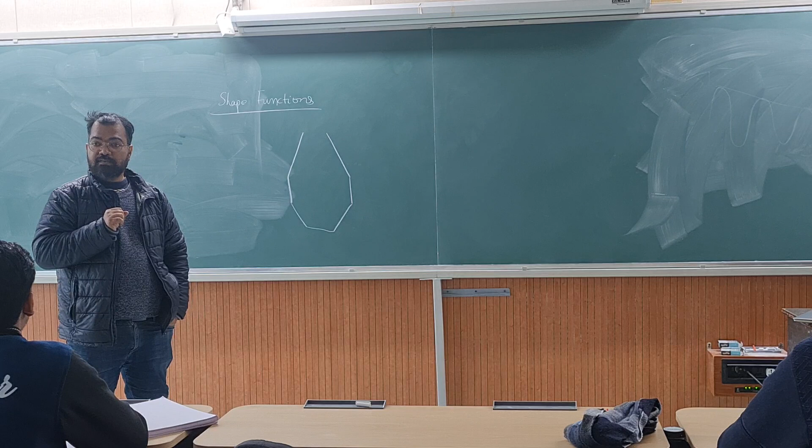Material is known. So how thick a plate will you take? You will have to take a plate and bend it, weld it. You will be welding it. Then you will take another plate and weld it. Then you will take this part and also weld it. So welding is involved.

So what thickness of plate will you take, and how will you decide that? You can't make the full blast furnace and check if this thickness works or not, because that will take 10 years. So what will you do?

Just give me a prototype. How much load should it bear? It's a real blast furnace. How will you do it? How will you calculate how much forces are coming on this side of the plate, on that side of the plate, here?

We know the volume, we know the shape we want to make. We'll do some mathematical calculation, and we'll test in the sample how much load it can bear with this force.

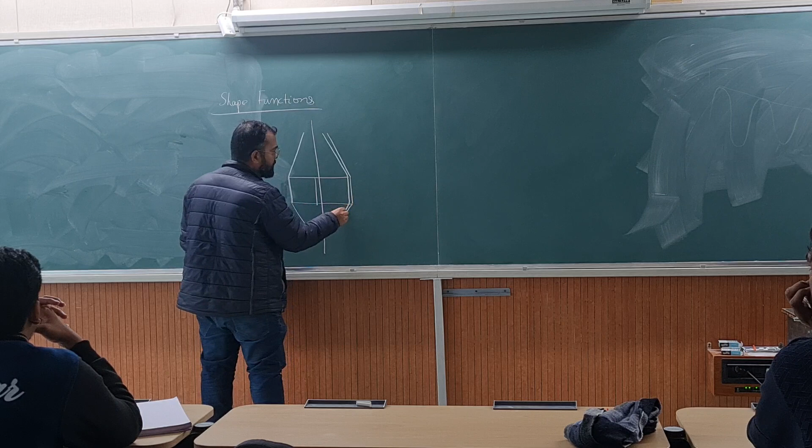So what you can do is you can define this problem as an axisymmetric problem, right? And you don't need to model the whole thing. You only need to model this one thin section which is symmetric along the axis of the blast furnace. Take some thickness and then you model the piece.

So make the piece, make the sketch of it, and then either you do hand calculation or you allow some software or coding so that this plate behaves like the material will behave, whatever material you have chosen.

Okay, so suppose you have chosen mild steel. So what are you expecting? Obviously there is going to be elastic deformation, right? And mild steel is isotropic, so you need elastic modulus, Poisson's ratio.

Done. It might deform plastically or not. You want to make sure that it will not deform plastically, correct? You don't want your blast furnace to become a barrel furnace after 5 years. So you don't want it to deform plastically. In order to ensure that, you need to know how it deforms. Is this making any sense to you?

Yes. Okay, so what do you need? You need yield strength. Also, you need the strain hardening behavior. So suppose this is the stress-strain diagram of the particular type of steel which you are choosing. So you want this behavior from here to there.

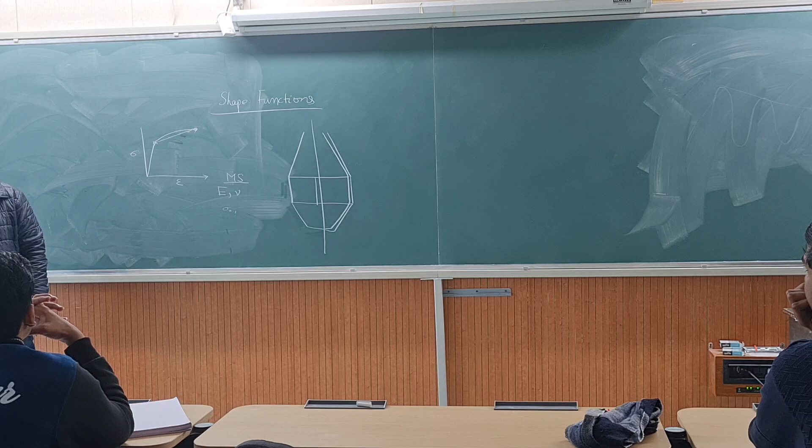A very crude way of doing that would be to take only this point and that point and immediately assume something. Okay, that is not conservative—oh wait, that is conservative, because that is the worst behavior you are taking. So conservatism is good, but over-conservatism is not, because you are not realizing the full potential of the material. Based on this conservative calculation, you might choose a very thick plate which you don't need, which will unnecessarily cost you a lot of money because you are making the blast furnace.

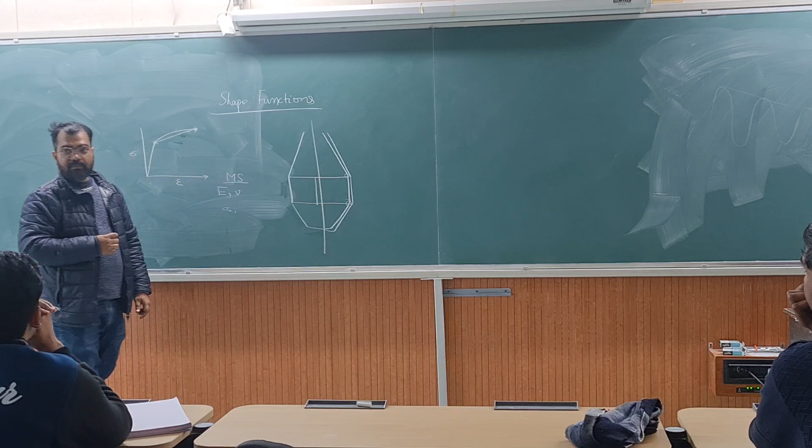So you don't really need to make the whole thing, you just need to model it. Instead of imagining the effect of curvature, because there is an angle there, there is an angle there. Material is deforming elastically, plastically, so you need to update with how much amount of strain is coming because of the forces.

Apart from that, you also need to take care of the temperature. There is a temperature, there is a ceramic lining. This ceramic lining will have some thermal conductivity. So how much temperature is there, how much temperature is here, and then you will assign that boundary condition—on one side you have that temperature, that side you have that temperature. So thermal strains will come.

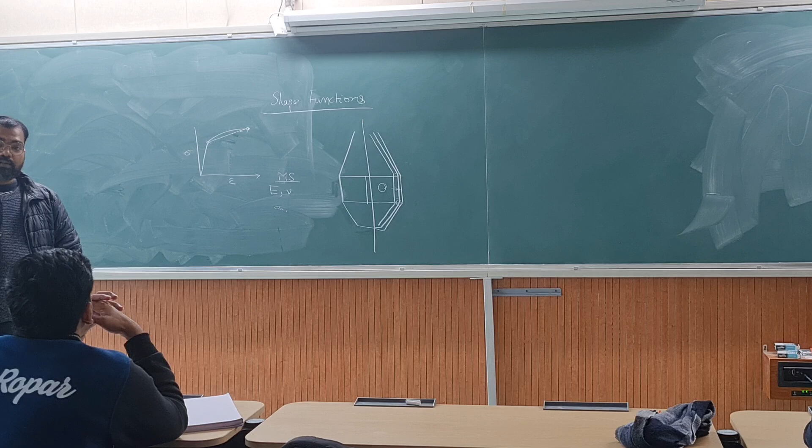Apart from that, you can have creep deformation. Also, how many times you are shutting down the blast furnace for repair?

Or you don't have customers, you are a very bad company. So only 2 customers are asking for steel every quarter in a year. So for the rest of the 3 quarters, your blast furnace is down, or at least 2 quarters. 1 quarter you're repairing, and then you're going home.

Every year, 1 quarter it is switched on, and then it is switched off. So then thermal strains are coming and going, so there is cyclic loading. That cyclic loading might cause low cycle fatigue. So you need to take care of monotonic plastic deformation, elastic deformation, creep deformation, fatigue deformation, and thermal strain.

And if you are putting your blast furnace in some harsh environment, then corrosion can also happen. All those things, can you do it theoretically? That is very complicated and also open to a lot of errors because of analytical calculation, but people do that.

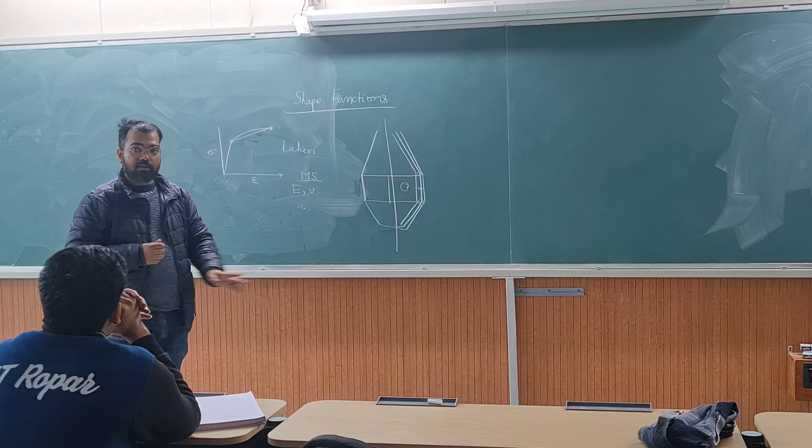So mathematical modeling of blast furnace is done. For the first time, I believe it was done by Lahiri from IISc Bangalore. In mathematical modeling of a blast furnace, you can also do mass balance, force balance, and heat balance, all those things. That is a part of modeling any furnace.

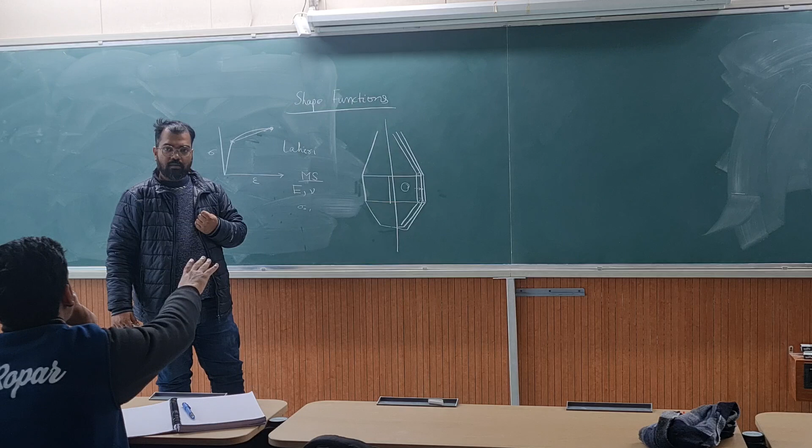The force on this side will not be equal. Why? If we test by putting a liquid in there, the force the liquid will... No, it is axisymmetric. Are you saying that there is no force on this side, on this side, on the middle boundary? On the middle boundary, you will have force.

That you can do. So when I model it, I will not put liquid in it. I will say how much hydrostatic stress is coming - that will be my boundary condition. My boundary condition will be how much temperature is on the surface. I'm not bothered how much temperature is here, because that is not going to the plate.

So when I assume this to be axisymmetric, what might I miss? There could be many things, but one thing I might miss is that whenever I make a plate, I cannot be sure that the thickness is uniform all along. And that is a complicated thing to take care of. So that variation I have to deal with. And how do I deal with that?

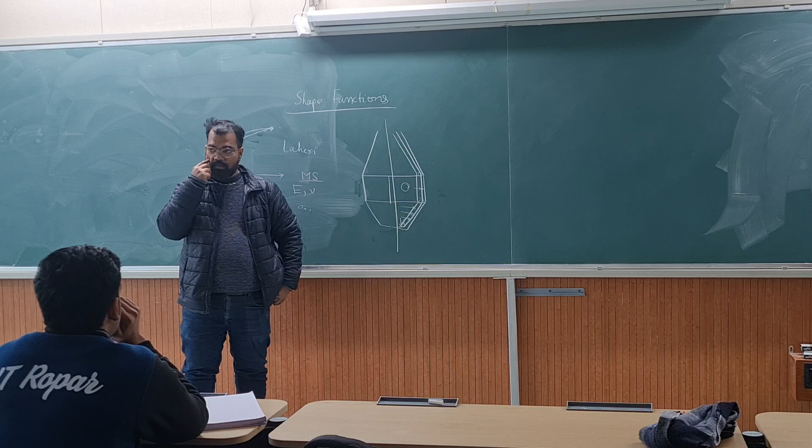Factor of safety. So I have this piece now, which I want to understand under the boundary conditions - I have hydrostatic stresses and temperature on this. So then I divide this into small pieces, very, very small pieces. And in all those small pieces, I take things, so I assume that these small pieces are so small that all the variations are linear.

So I take one box, and in this box, what do I need to vary? I need to vary displacement from this to that, this to that. Also temperature in all the directions. So U and T are my variables.

Which I am trying to calculate, also interpolate. And if I assume the variation of this degree of freedom from this point to that point is linear, then that is my linear shape function.

So I say that displacement from whatever value is here and there, U1 and U2. So the displacement anywhere between U1 and U2, I can describe it as this - I can simply write, in this case, N1 U1 plus N2 U2. If I have more number of elements, more number of nodes, nodal values, then it will go on. So Ni Ui is implicit that you have to sum over all the values of indices.

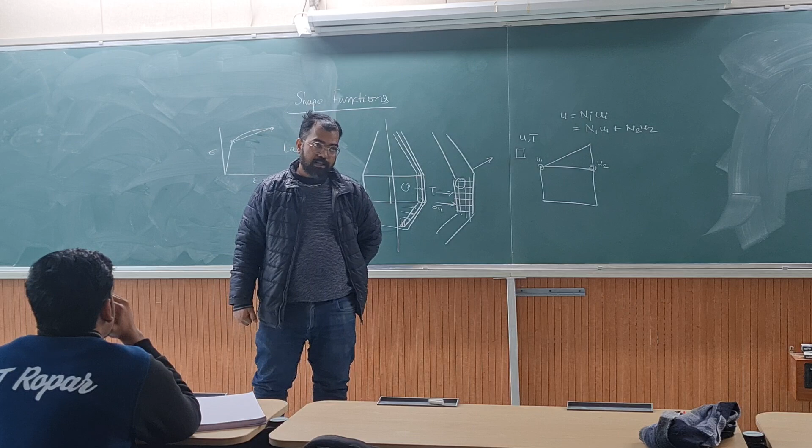If I divide this plate into 100 small boxes like that, and if I divide this into 10,000 small boxes, will it make a difference? Yes. Why? That's why we're dividing - more elements. No, I'm asking an open question.

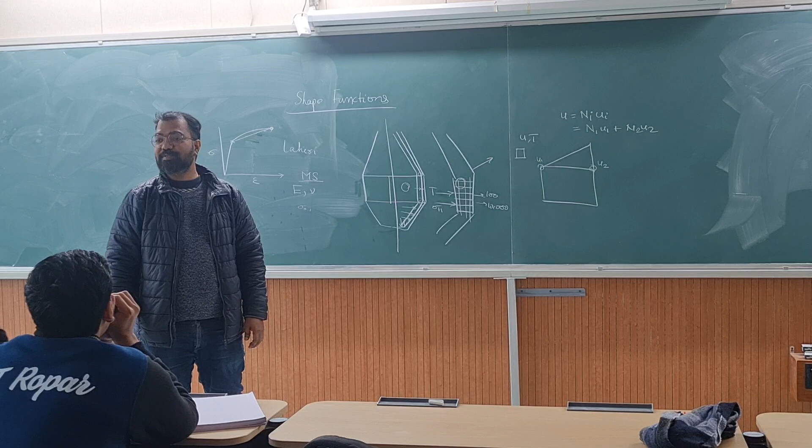So because we are considering that variation is linear, but it's not necessary that it will be linear. Yes, very good. So along this point to that point, let us take this point and this point, and I only have two elements here.

And my shape functions are linear, so I am going to get something like that, and then there is a slope of change in slope. So I'll get this kind of variation, which is what you are doing in that cantilever problem. Right? So you can see, and that's your assignment, if you divide it into more number of pieces...

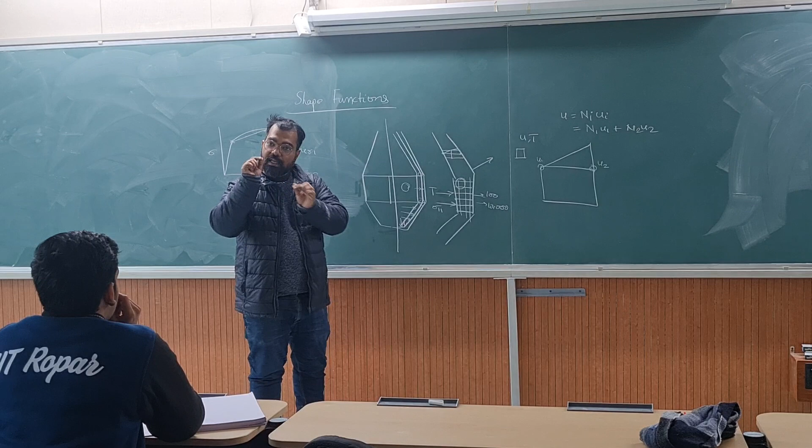The values which you are calculating from each element will come closer to the analytical solution. Why? Because there is a gradient which fewer elements will not be able to capture. Okay? So suppose that, again from this point and that point, the real variation of displacement is something like this, and you have divided into, let us say, four elements.

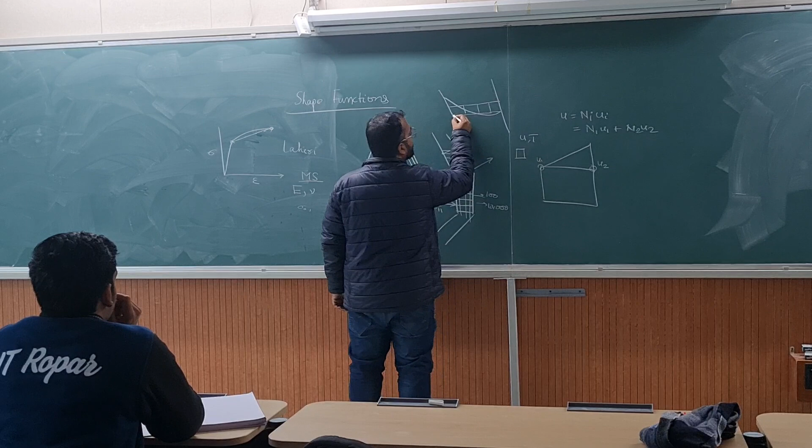So here you probably get one point which is there, and then you get another point which is here, and then in this element you get a displacement value which is somewhere there and there and there and there and there and there, something like this you get. So your calculated profile of displacement will be like this.

You don't have any value between these two points. If you further divide it into more pieces, so instead of 4 you have 8 now, so you will have one point here, one point there, and extra points in between as well.

So if the curve was really like this, and because you only had 2 points, between 2 points you can only draw a straight line. So if you have another point, because now you have one more element there, you can get a bilinear profile. With more elements, it will become a polynomial, isn't it?

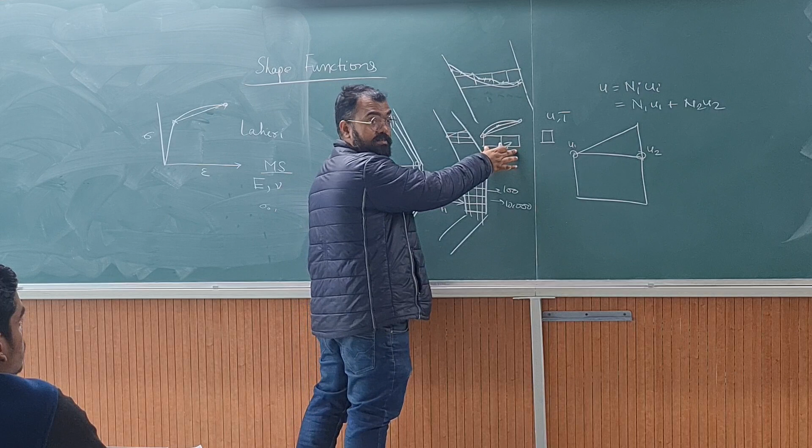Another way of doing the same thing is not to divide one element into 2 pieces, but to use a shape function which is quadratic, not linear, or cubic, or polynomial. Instead of dividing into 10 pieces, I can have a 10-degree polynomial, and I can achieve the same thing.

So both of these two methods are causing the same result: gain in accuracy. So which one will you prefer? Higher number of samples?

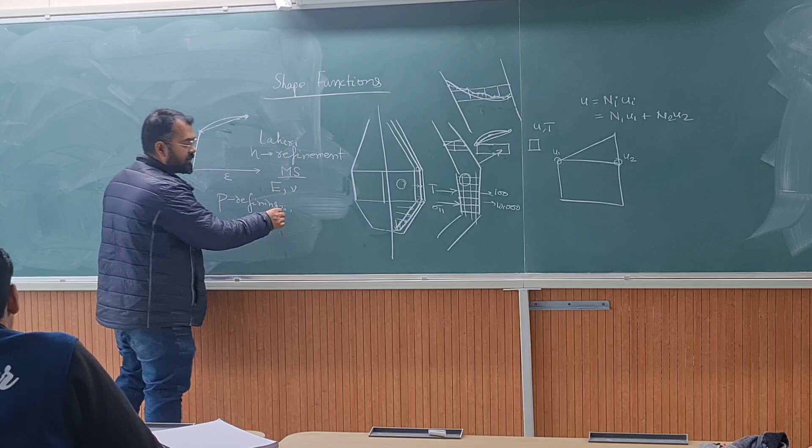So when we divide into more elements to increase accuracy, that is called H refinement. And when we use higher order shape functions, those are called P refinement, because polynomial degree is giving a higher degree. And why H? Polynomial gives P refinement; H is because there is a height.

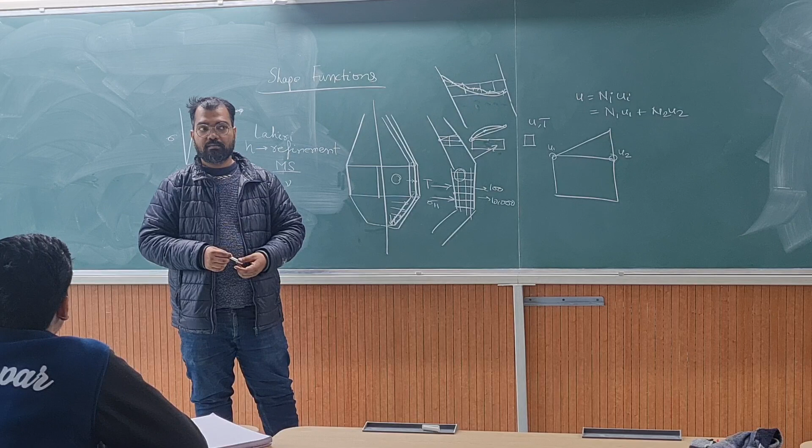So which one will you prefer, H or P? H, why? Because with a polynomial, we do not know which equation we need to take. You could take any quadratic or cubic. Whereas in linear, you are taking linear, no?

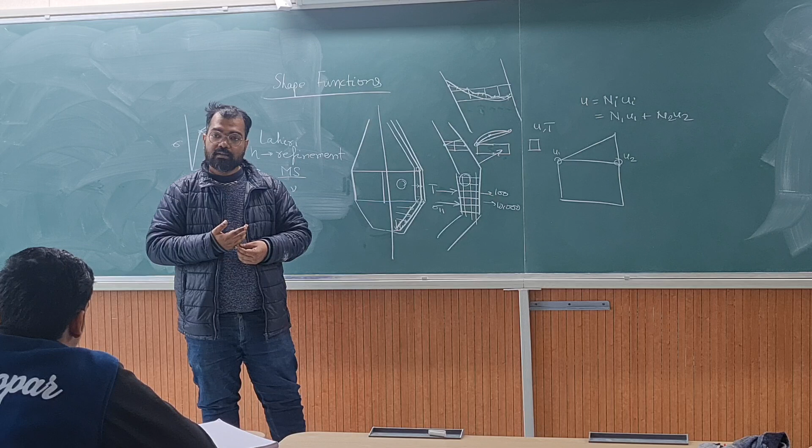So if you are using H refinement, that means you are taking a linear shape function. Using that linear equation approach versus using a quadratic equation, in any case you don't know what is the real behavior. If you knew, then there would be no point in doing it. So you don't know, so you are approximating. When you approximate a curve, here you know that it is linear.

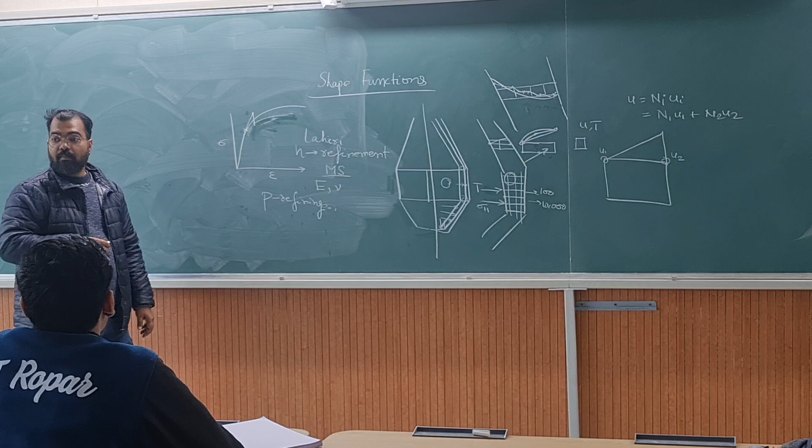Now suppose you want to know what is the real behavior of the material. You will have an expectation, then a prediction, and you will go to a certain value. Then you will have a corrector which will tell you that you have gone too high. So then your next iteration will be a little lower, maybe. It's like finding a root, using the bisection method or Newton-Raphson method.

In P refinement, if we keep on increasing the degree of the polynomial, it is not important that the accuracy will increase only. That is also not guaranteed in H refinement. That point I forgot to make.

So now I divide 4 elements into 8 elements, then into 60 elements. After a certain point of time, I don't really gain any accuracy, because I'm done. When I refine further and further, I'm just increasing the load on the computer, that's it. If the real behavior is cubic, there is no point in going higher than degree 3. If I take degree 10, I will not gain any accuracy. So the same thing that applies in H refinement also applies in P refinement.

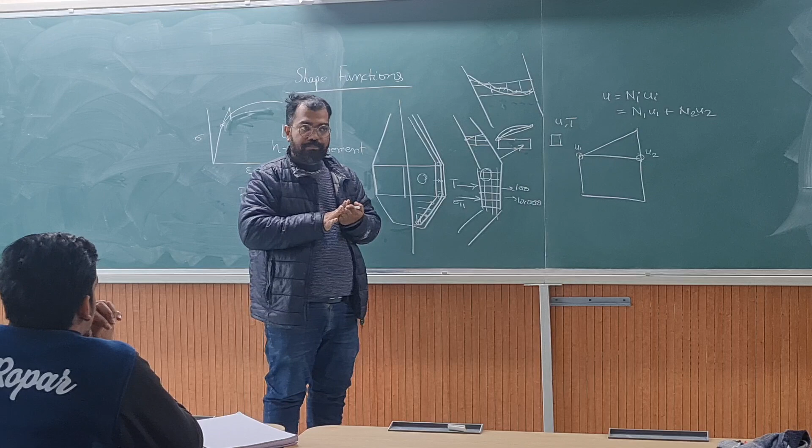So hold this question with you and try to answer it before mid-sem. Okay?

Good. So the physical understanding of shape function is that—and did we try to derive the shape function or not?

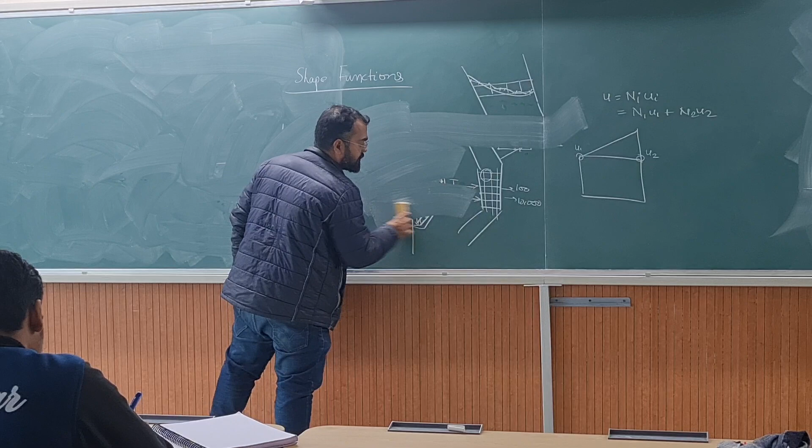Okay, so one method of deriving shape function is called the Lagrangian method. And that method is very simple.

So suppose you have n number of nodes. But before that, I was explaining something in the last class, which was that when we divide this blast furnace or cylinder or trapezoidal, cantilever beam, table, whatever - not necessarily because of the geometry. So the blast furnace is making an angle like this. You can have a very fine curvature in some objects, maybe you are modeling a ring. So every time it is not possible to put all the squares and fill all the space.

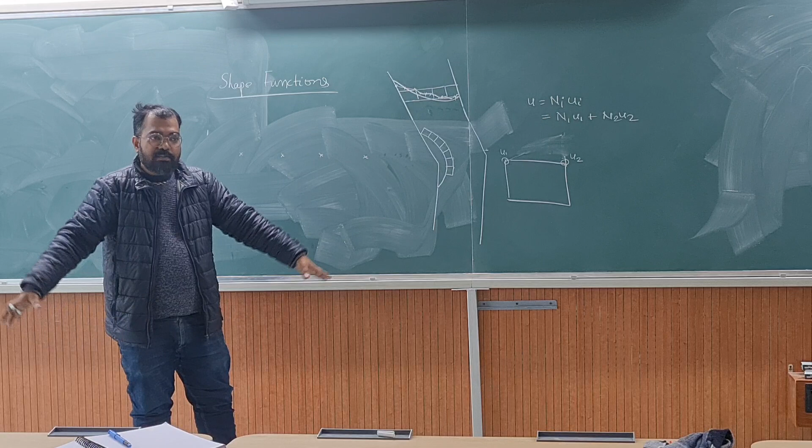You might have some space which is left, right? Because if you lay square tiles in a round room, something will be left over in the corner, right? So in the corners, maybe you need to make an element which is like this.

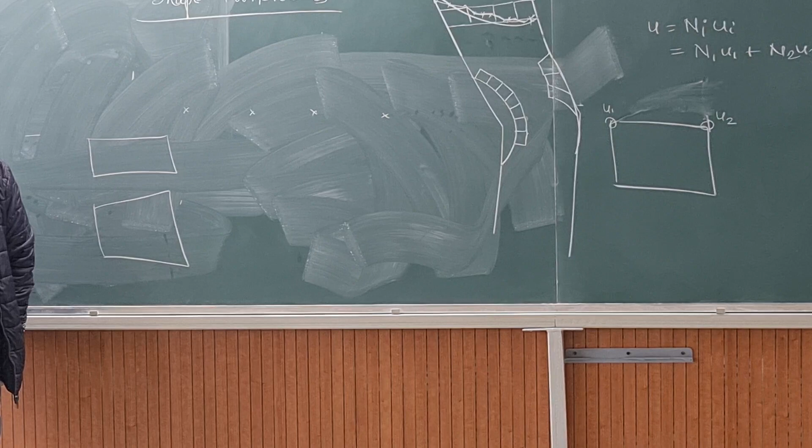So what I'm trying to say is it may not be a square, it can be a trapezoid. It can also be a rectangle, it can be a trapezoid. Not necessarily does it have to be a square, right? So every time we will have to take care of this thing, whether it is a square or not.

In order to do that, this thing is broken into two pieces in conventional finite element method, and that is to define a local coordinate system.

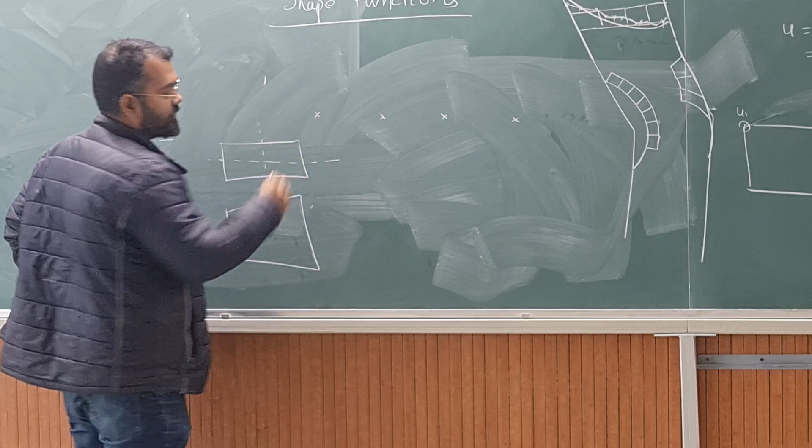So global coordinate system is x, y and z, and those values are telling you the real physical position of the material points. So suppose you are modeling this and you have kept your origin here, and the distance of the first interface of the blast furnace is 10 millimeter, and then you have a thickness of let us say 250 millimeter.

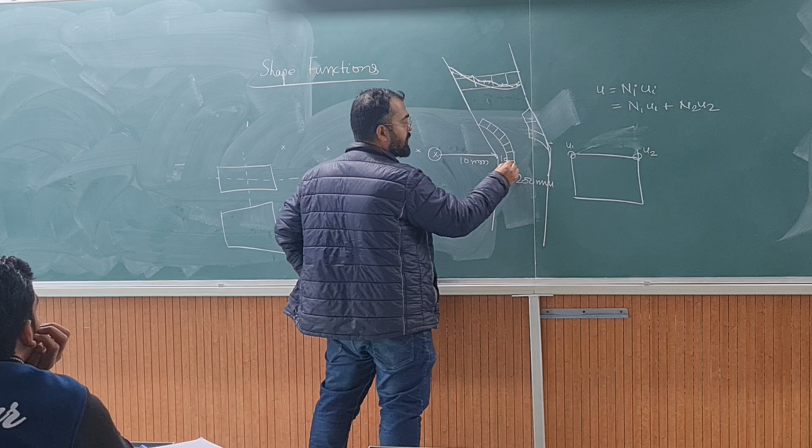Okay, so you have done that. So the point of this will be just 10 comma 0, right? If this is the origin, this is the x-axis. So those values are telling you the real location of the material point.

And then when I define a local coordinate system, this local coordinate system will operate the same for every element but inside the element. Whenever you need to connect this thing to the adjacent element, you need the information of real space. So you need the real coordinate system and a connection of local to global, that you need.

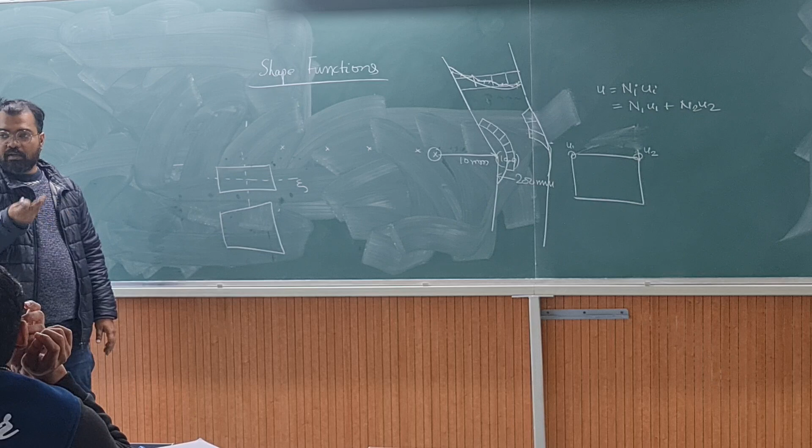So for the local coordinate system, I define the x-axis - I can't call it x-axis, so I call it something else. This thing is xi, but I will call it epsilon because it looks like epsilon. And then the y-axis I will define as eta. So epsilon and eta are local x and y.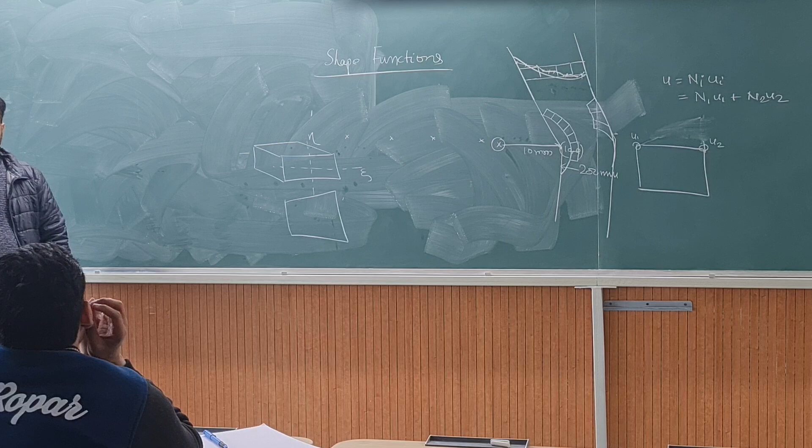For each element in 2 dimensions, I have one xi, one eta. When we will talk about 3 dimensions, then we will have a brick element, and in that I will need another axis, which we will talk about when we talk about 3-dimensional elements, and we will do that very soon. So now we should be happy that we are dealing with 2-dimensional elements only.

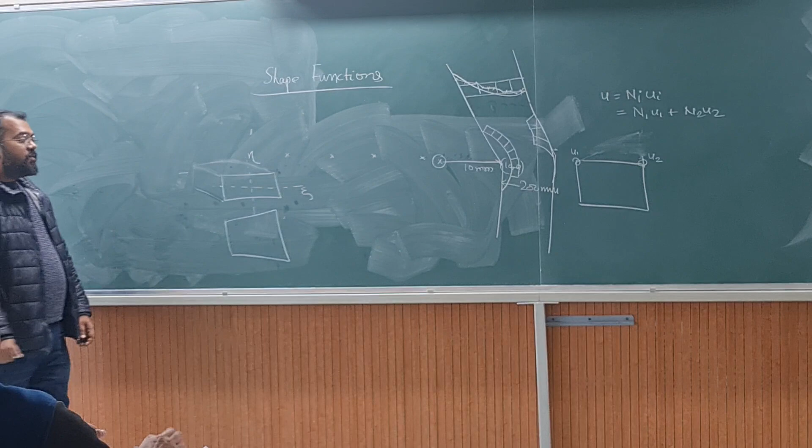So now we need a method to find out the shape functions at these nodes. Very simple - I can define the local coordinate system first. I'll do that. So the property of the local coordinate system is always that the origin is at the center, and whatever is the dimension of this 2D element, it doesn't matter.

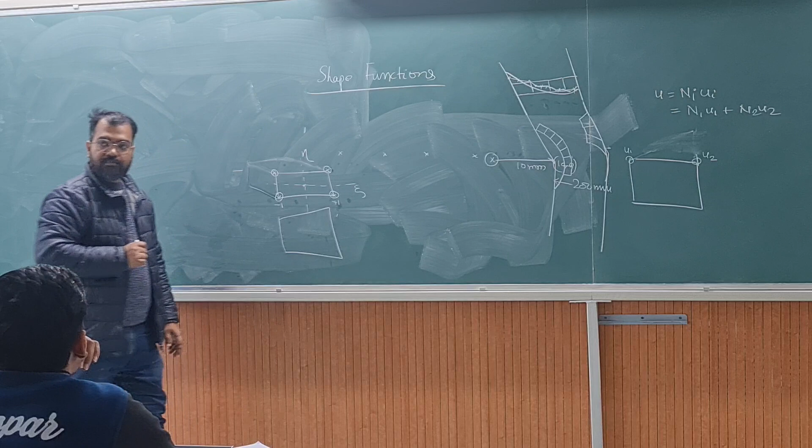It will always have a value of plus 1 on this boundary and minus 1 on that boundary. It doesn't matter if this dimension is equal to that or not. It doesn't matter, that's the property, that's what we are going to do.

So even if this really is 2 millimeter and this is 1 millimeter, my xi value will be plus 1 here, minus 1 there, and eta value will be plus 1 here and minus 1 there. So it is shrinking whatever geometry of the real element is to a square.

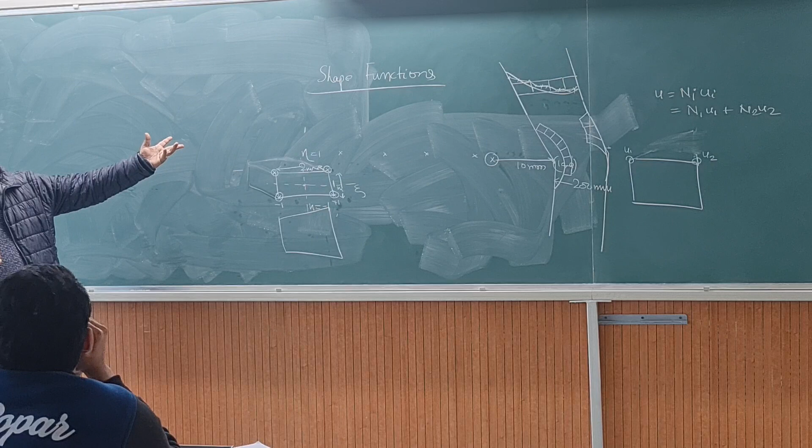Okay, fine, so now that is done, and now we need to find out the shape functions at nodes, which will be N1 and N2. If I have 4 nodes, then I will have N1, N2, N3, N4.

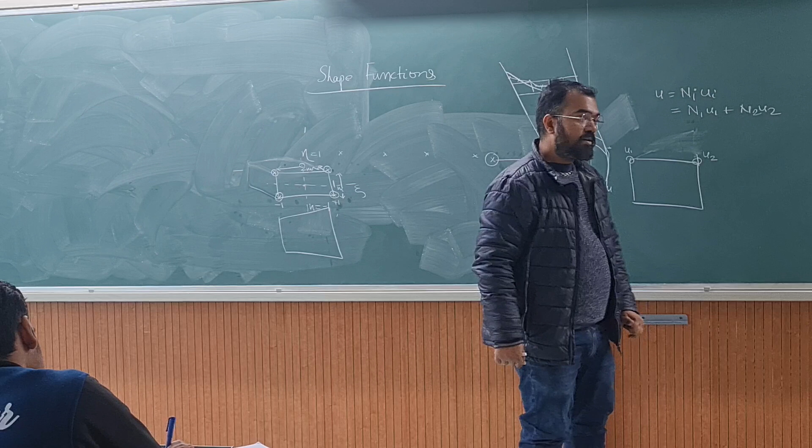And any point within this element, I want to know what is the displacement here. So how will I compute that? How will I find out the value of displacement at this point, at A?

By using that formula, isoparametric formulation. So I will say here U is equal to N1 U1 plus N2 U2 plus N3 U3 plus N4 U4.

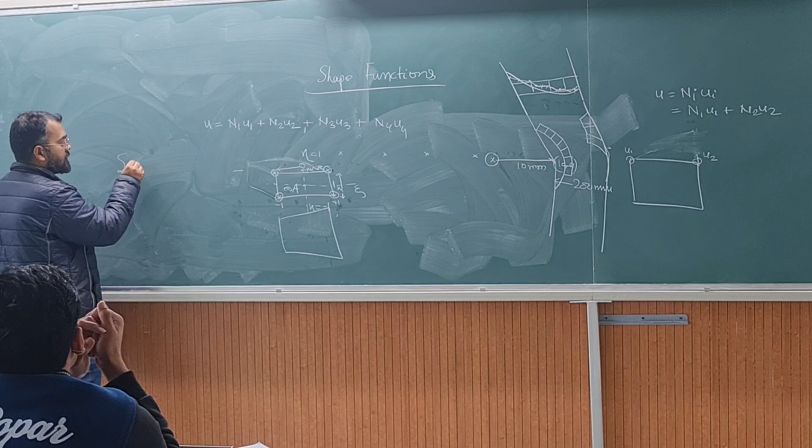So because it is 2-dimensional, U is U1 and U2, one in the x direction, one in the y direction. That will be equal to, and then I will have here displacement, which will be U1, U2, U3 and U4. Right, what am I missing?

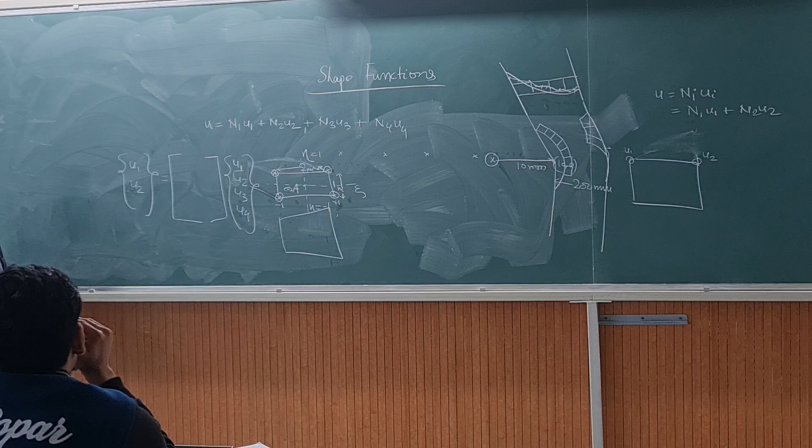So instead of U, because there is too much confusion - here U2 I have written as the displacement in the y direction, and here U2 is the displacement on node number 2, so there is that mistake. Let me write it U1, V1, U2, V2, where V resembles the displacement in the y direction. So now on every node I have, on this node I have U1 and I have V1. So I have U1 V1, U2 V2, U3 V3, U4 V4.

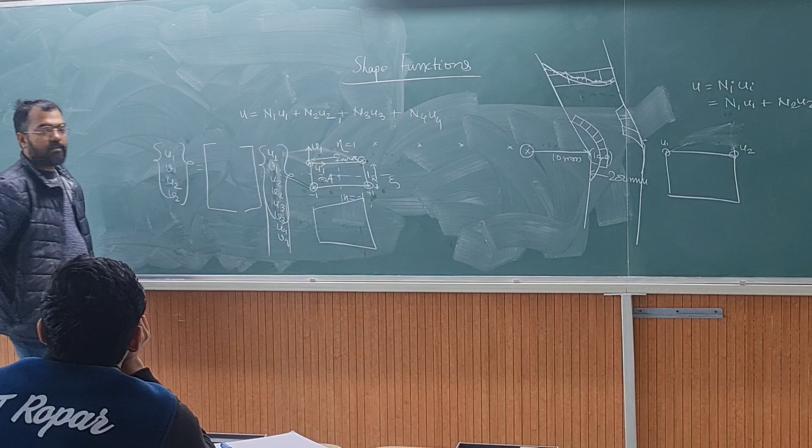Okay, so what should I multiply this? What should I keep here so that I get that? So U1 will be equal to that. What should I do? Or UX? I should write UX. Yeah?

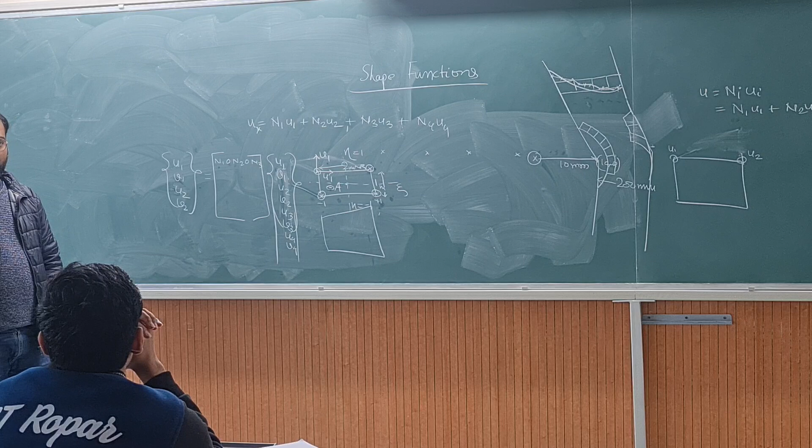So should I write N1? Yeah? 0, N2, 0, N3, 0, N4, 0? Is it not making any sense to you? No? Row column multiplication? Yes. Oh, you got it? Thank God. So you multiply this with that and you get that. Right? So this is the matrix type of formulation for doing the same thing.

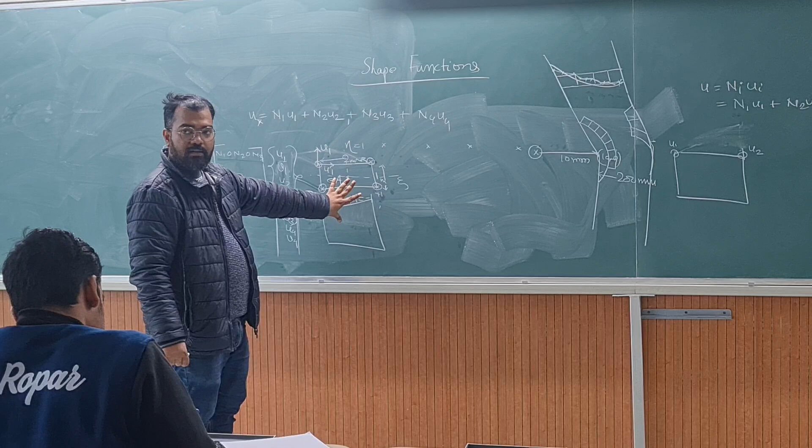So local coordinate system, how do we, what are the properties of this, and how do we calculate displacement at any location inside is dependent on that.

Now we need to define N1 and N2. Otherwise, N1 and N2 obviously you must have fathomed for now that they cannot be constants. If they are constants, then you will always get one value. So then there is no meaning of that, because at any point you will always have this formula.

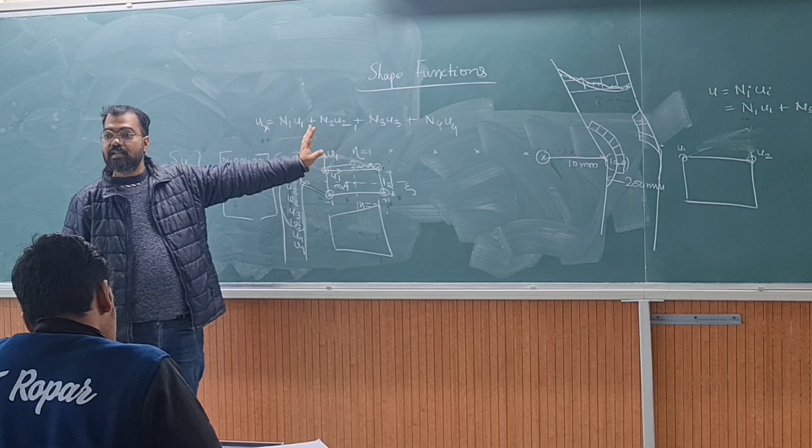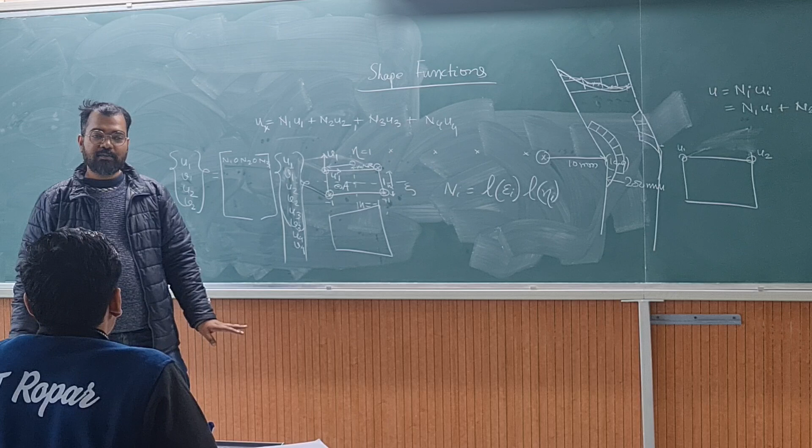So obviously Ni's are not constants, they are a function, they are shape functions. Okay, so the way we derive it is that Ni should be L xi I into L eta I. Understood? Now, I'm going to tell you what L xi I and L eta I's are. Okay, so.

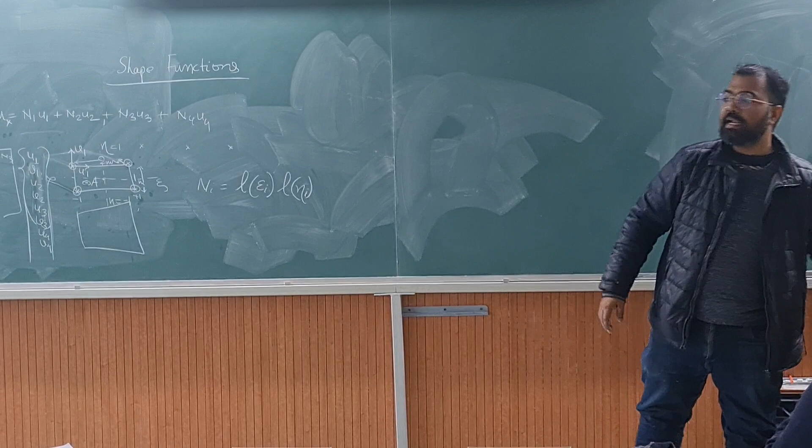Simple trick, what happened? Sir, these U1, V1, U2 up to V4, on the right side, these are the displacements of each node. Yes, these are nodal values. Yes. And sir, what is this then? This is at any point you have U1, V1, U2, V2, no? Okay, at any point in the material, in the element.

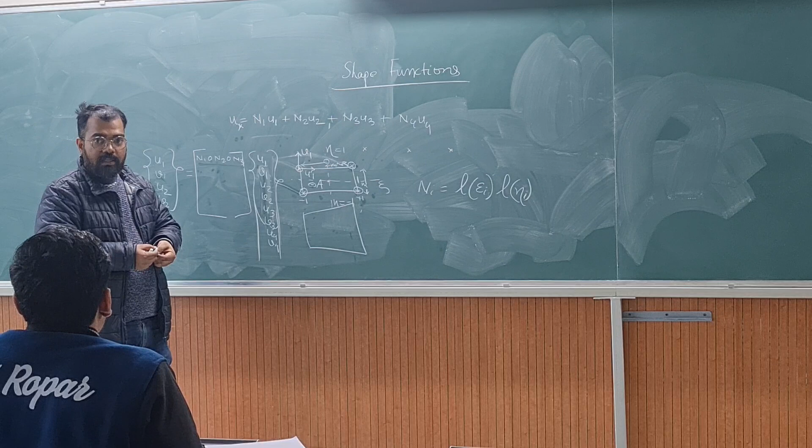That is the concept of shape function, that you want to interpolate the values. You have the nodal values, and then from those nodal values you want to find out what are the values inside the element. So you should also understand that at any point within the element, the values are coming from the nodal values. So whatever accuracy you have in nodal values, it cannot increase from that. You are getting the info within the element from those values only.

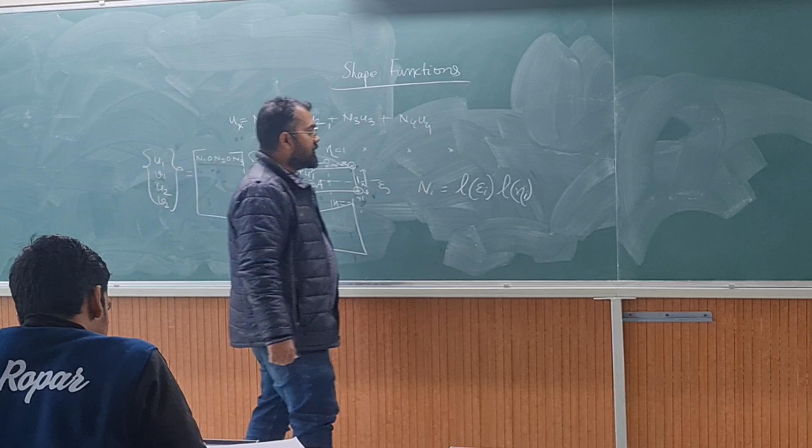Okay? So how do we find out now L epsilon I and L eta I? L because Lagrangian. Okay, so the trick is...

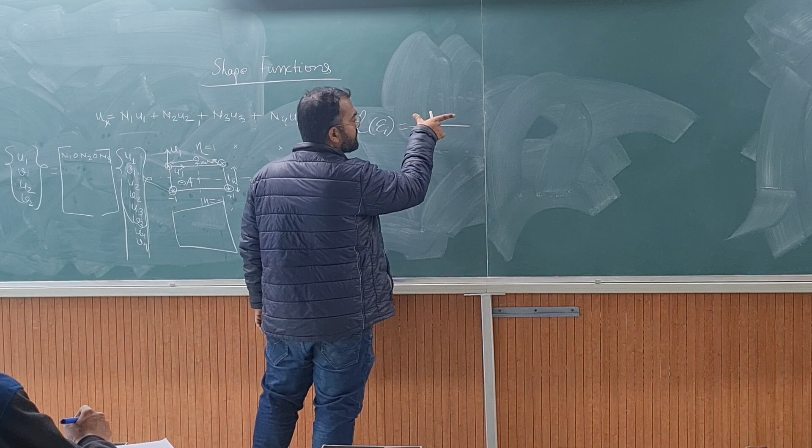I have to define L epsilon I, and that will be some numerator divided by denominator. So the numerator will be any variable in the epsilon direction. So epsilon, that's a variable, minus all those points, the value of epsilon of all those nodes which are connected in that line. So if I have, in this line I have node one and node two. Two nodes are there, so I should write epsilon minus epsilon 1 into epsilon minus epsilon 2.

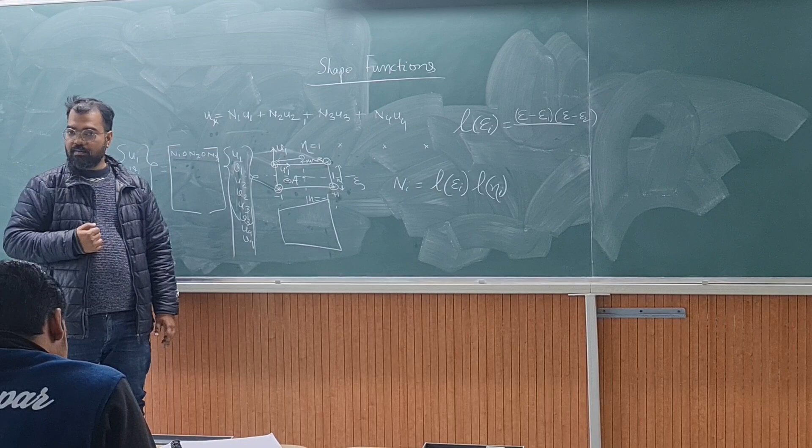Except the point where I am calculating, I have to remove that. If I am calculating at N1, then I will have to remove this one. Okay?

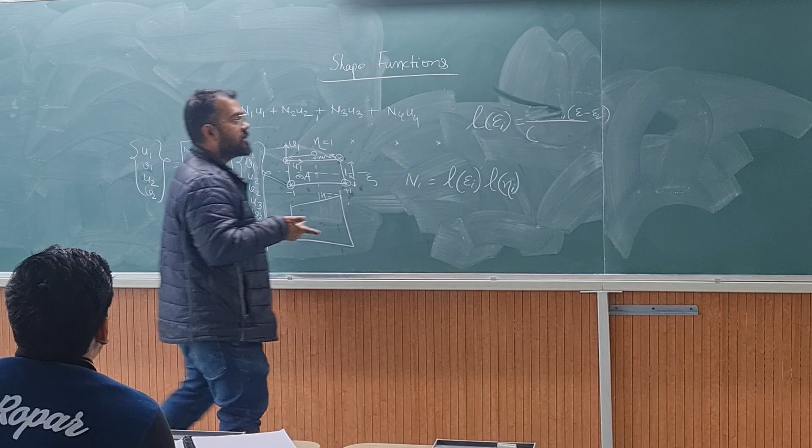In the denominator, I will not use any variable, I will use the value. So how many nodes do I have? I cannot write epsilon 1 minus epsilon 1. The denominator is simply the numerator with the value of the nodal point placed in it. So if I would have written epsilon minus epsilon 1 into epsilon minus epsilon 2, the denominator will simply be, because I am calculating it at N1, what is the value of epsilon at N1? Epsilon 1. So I will write epsilon 1 minus epsilon 1, epsilon 2 minus epsilon.

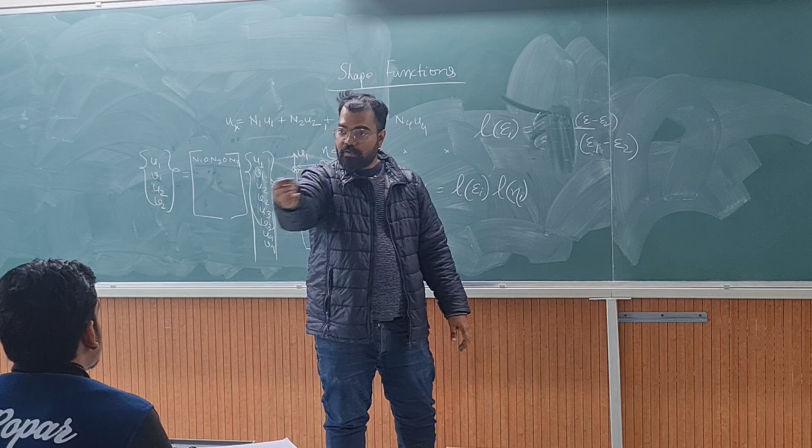So when epsilon is equal to epsilon k, and k is any node wherever you are calculating, those things you have to exclude. Understood? Done? Clear?

Now same concept with eta. So what should we write? Epsilon, eta minus, divided by... okay, looks very simple, no? So in eta you have to see in this direction, right, because that's the eta axis. Clear? And then Ni will simply be that multiplied by that.

Okay, so let us do it for N1.

So for n1 I will write epsilon minus epsilon 2, how much is that? Let me make a clear picture. This is the epsilon axis, this is the eta axis. This point is 1 comma minus 1. This point is 1 comma 1. This point is minus 1 minus 1, and this is minus 1 comma 1. And that is n1, n2, n3 and n4.

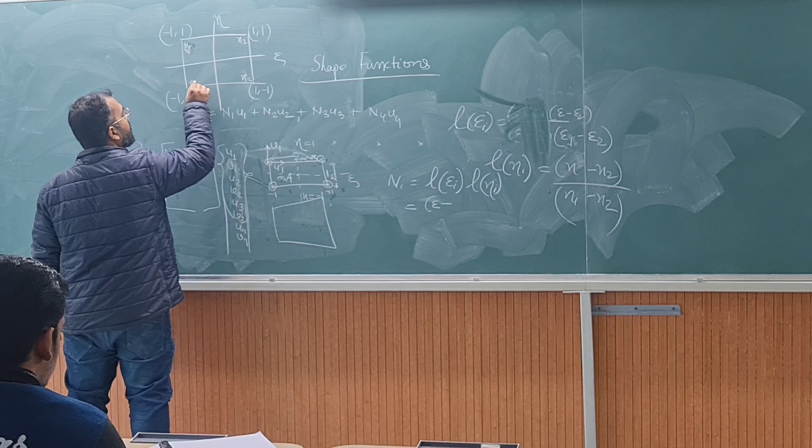Small n resembles node numbers, capital N resembles shape functions.

In this example we took 1 millimeter, but it doesn't matter, it can be 100 millimeter. It will always make it 1. It will shrink any shape to a square of dimension 2, from 1 to minus 1. It will always deform the things to a square, and whatever error comes will be taken care of by the relation between local and global coordinates. The shape function will have a particular relation with the real coordinate system, described by a matrix called Jacobian, which we will discuss.

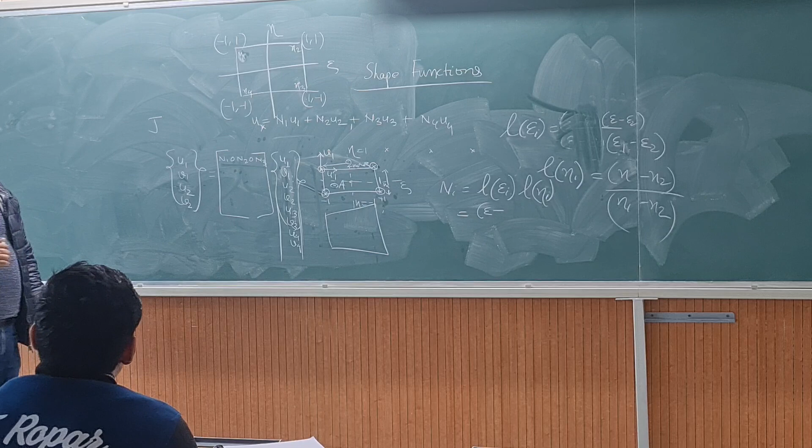So for now let us calculate the value of n1: epsilon minus epsilon 1, how much is that? N1 is that. So epsilon 1 is minus 1, so that will be plus 1. Then divided by epsilon 1 minus epsilon 2. So epsilon 1 is minus 1, minus 1 minus 1 is minus 2. So minus 2. Now what about eta?

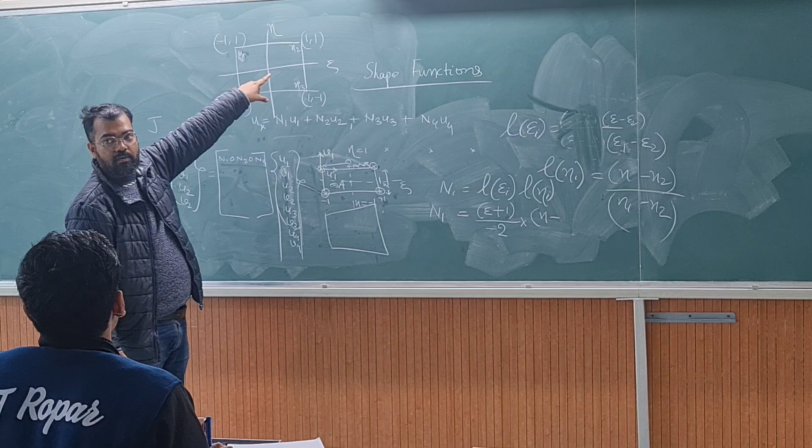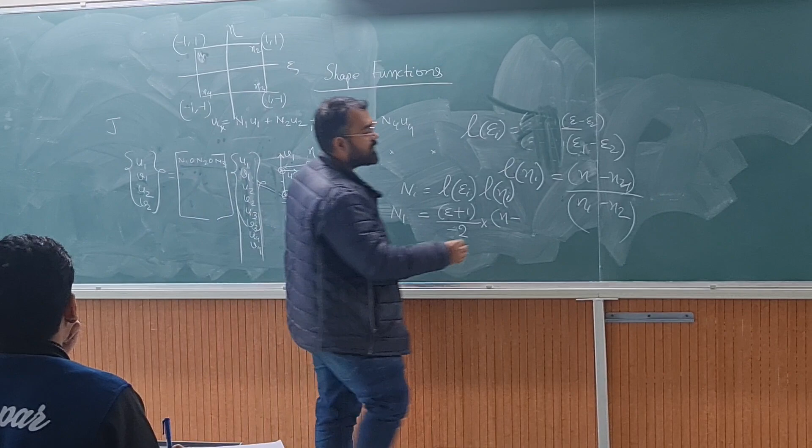So this becomes minus 1 by 4, times 1 plus epsilon into 1 plus eta.

Similarly, you can calculate n2, n3 and n4. You can do that, right? So you should do it, not necessarily now, but note it down. Don't only open the notebooks when the class starts, you should also open it when you go back to hostels and do this.

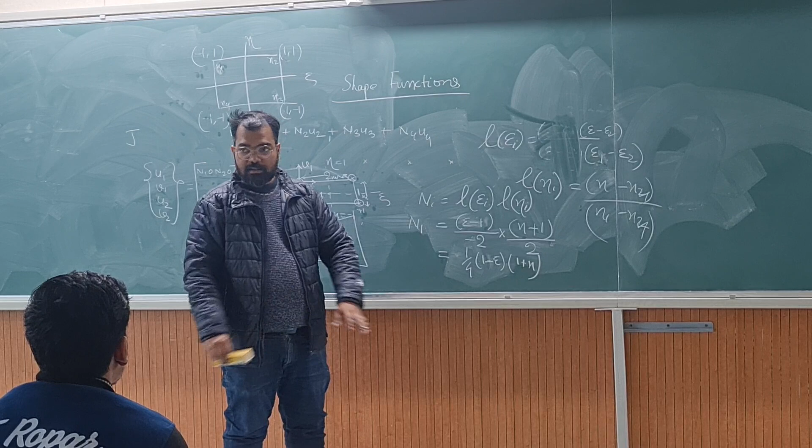So n1 will be this, and you should calculate n2, n3 and n4 also like this. You will see that only the plus minus signs will change, and the rest remains the same. So it will be 1 by 4 times either 1 plus epsilon, 1 minus eta, or 1 plus epsilon 1 plus eta, or 1 minus epsilon 1 minus eta, things like that. So 4 possibilities are there, and you will get all 4 when you calculate N2, N3, N4.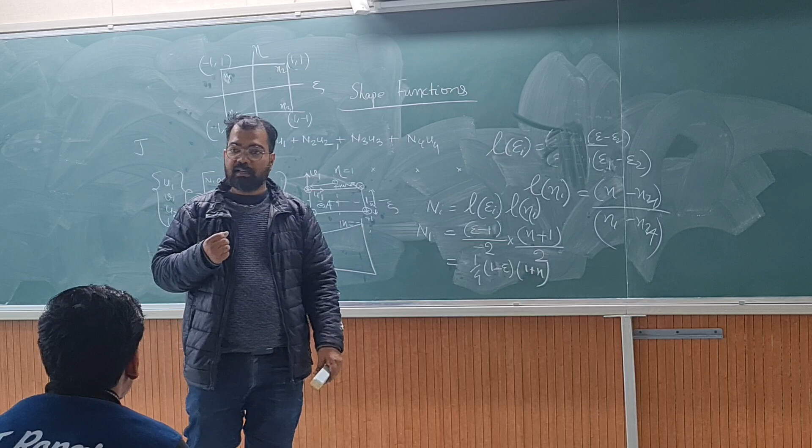So now we know how to calculate shape functions, and with shape functions we can calculate displacements at any point, right? So this we can do. And how do we calculate strain then, epsilon ij?

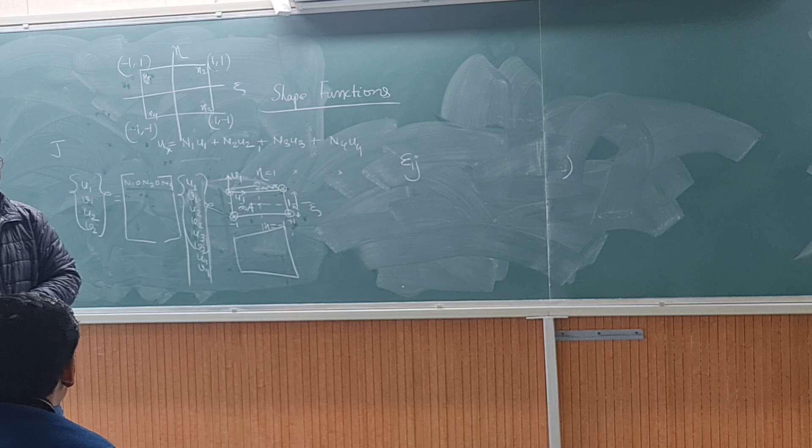Remember, MM302 will always be calling you. Epsilon ij, how do we calculate this? This is a golden opportunity, tell me epsilon ij, how will we calculate it? What is the formula of epsilon ij? Del u by del y plus del v by del x.

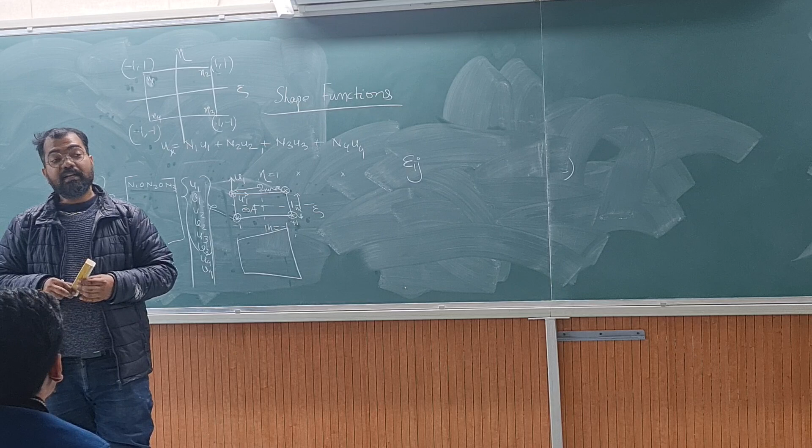Very close, but you will not pass because it's not completely correct. So 1 by 2 into... yes, yes.

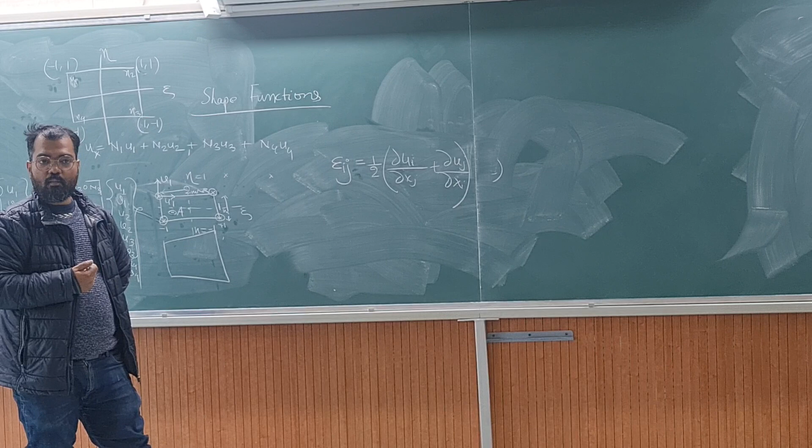Displacement, you know that? What is UI? UX? And that is that. UI will also be found, right? UI is equal to N1 U1 plus N2 U2 and so on.

So now how do we calculate strain from this?

Yes, so epsilon we can write as this: del n_i by del x and the appropriate combination, into u_i, because u is n_i u_i. So when I have to write del u by del x, I can write del n by del x into u_i.

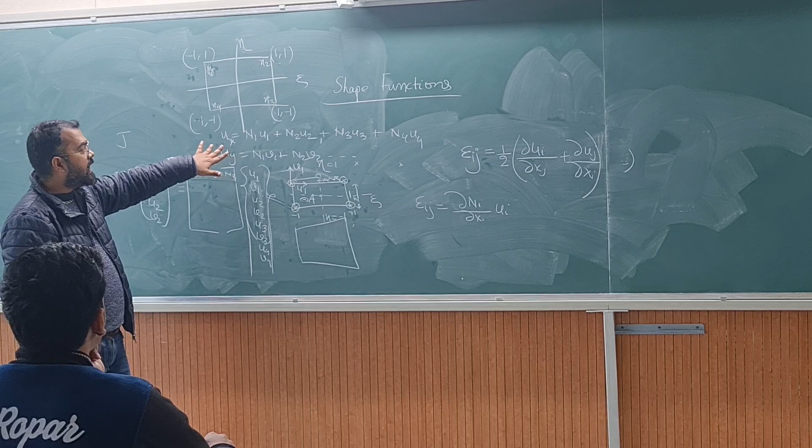Right? When I have to write del v by del y, then it's del n by del y into v_i. That I can do, right?

So I can make a matrix which looks like: del n1 by del x, del n1 by del y, then del n1 by del y, del n1 by del x, and this is 0, this is 0, and then repeat it for n2, n3 and n4. So for n2: del n2 by del x, del n2 by del y, and del n2 by del y, del n2 by del x, 0, 0. Then you write it for n3 and n4.

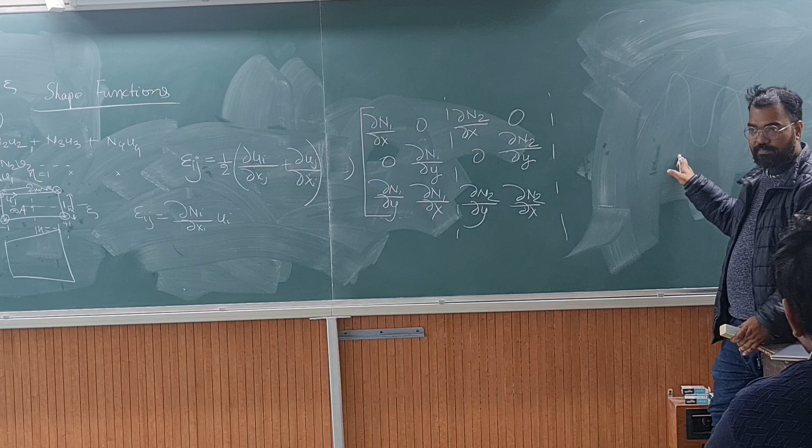Should I do that or can you do that? Yeah, it's simply the i's replaced with 1, 2, 3, 4 if it is a quadrilateral element, a square element. Okay?

And multiply this with our displacement vector u1, v1, u2, v2, u3, v3, u4, v4. Okay?

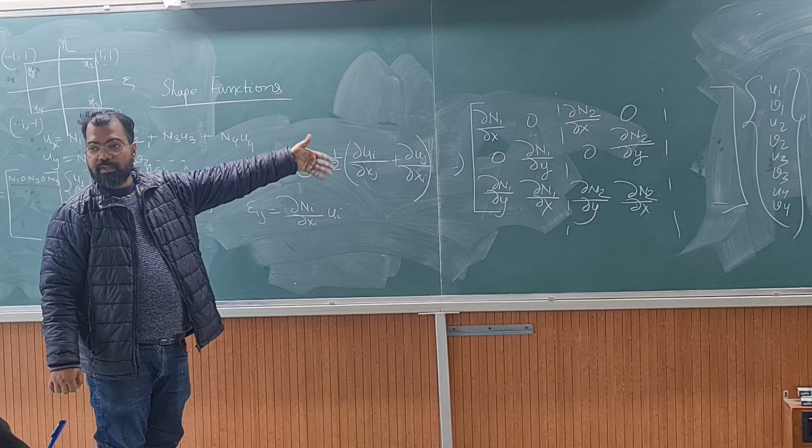So how many values are we going to get after doing this? How many columns do I have? 8, right? And how many rows are these? 3. So it's 3 cross 8 into 8 cross 1. So how many values are we going to get at the end of the day? 3 values. We'll get 3 values.

Epsilon xx, epsilon yy, and epsilon xy. In 2 dimensions, these are the 3 strains you have.

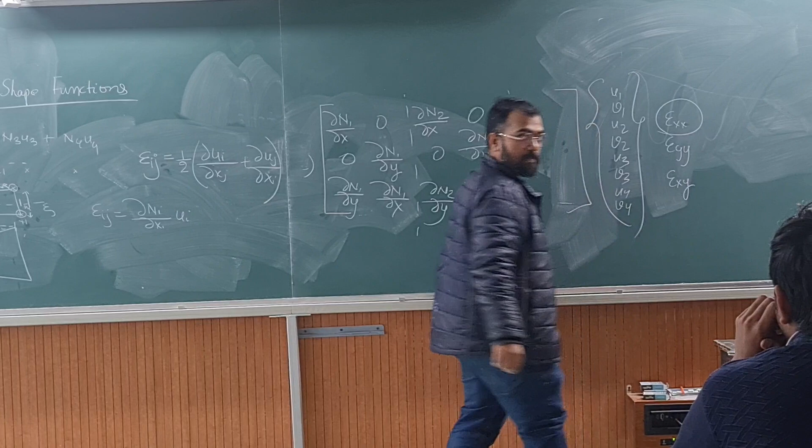Right? And if you see now, what will be the value of epsilon xx? Row column multiplication, so this whole thing into that.

Right? So del n1 by del x, u1. Del n2 by del x, u2.

So there's no problem anywhere with shear, right? If you remember this formula, epsilon ij when i is equal to j is simply this.

Right? We don't have the other variation. When I have a shear stress, then I have 2 parts, and that you will get because you have both of them there.

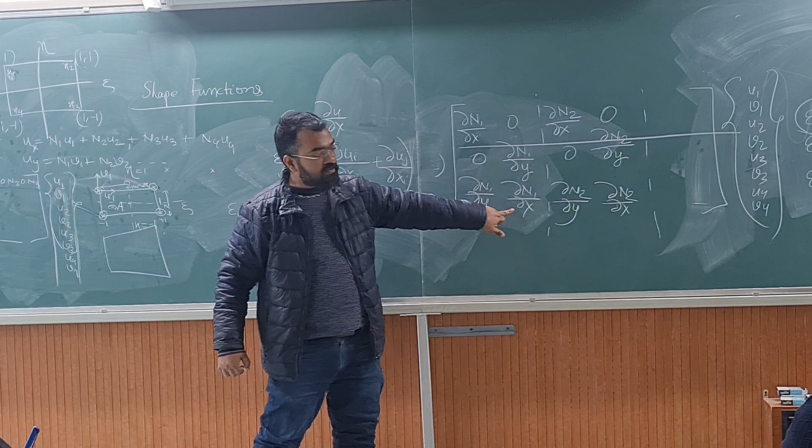Understood? This matrix is called the B matrix. Because of Balwinder? No, just like that, it has a name, B matrix. I don't know why.

Okay, I don't know why shape functions are named N either. I have really no idea. But this is called the B matrix, and in matrix notation, epsilon is simply B into U. U is a column vector and B is a matrix which looks like that.

Now from strain, we should be able to calculate stresses. And how will we do that? How do we calculate stresses from strain?